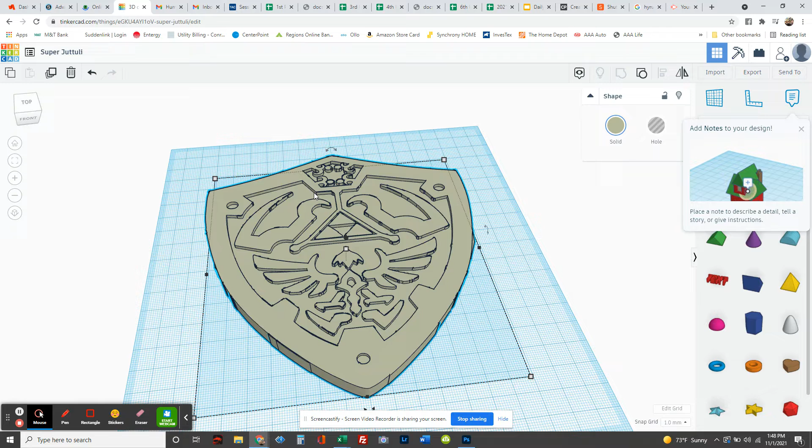Since my last video didn't record properly, I'm going to do it all over again. So, technical difficulties all day today. But anyway, we figure them out.

We make them happen. So the first thing you're going to want to do is find an image. I found this Hyrule shield. I've used this before, I've made the Hyrule shield before. I'm really just duplicating something I've done in the past, but that's okay.

You can pick anything you want as long as it's school appropriate. Nike symbol, logos, maybe your favorite rapper. I've had every kid doing something different.

But it has to be black and white. Okay, that is the trick. It cannot be like this Hyrule shield, any of these colors. That's not going to work out. Okay, it needs the contrast between black and white to work.

So I use this black and white image, and you're making shapes. You're making more robust shapes, so you can combine different shapes to create the thing that you're trying to make.

I have a lot of kids sometimes who want to do Dragon Ball Z. You would find black and white of Goku or Vegeta's hair. That'll work, and then you can import that in. But like I said, it depends on what you want to do.

So save your image. Okay, so you're going to save it as, there it is. I already saved it previously, but you save it. Then you go to the image converter. You choose the file. There it is. Open it. You're going to click Start Conversion. It will convert.

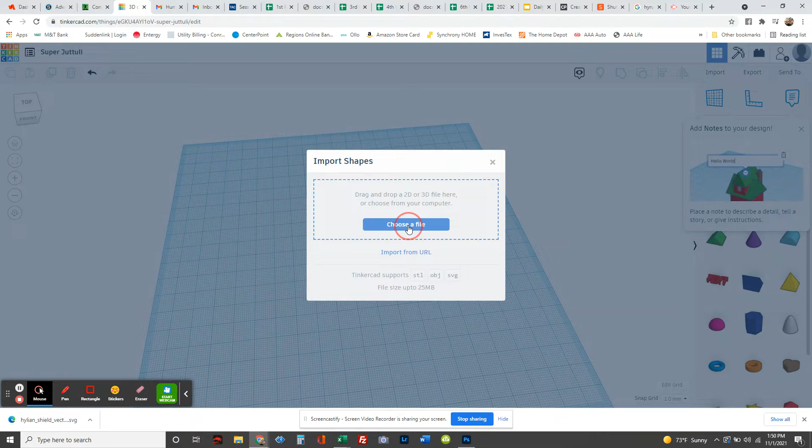Now I'll go back to Tinkercad. I will hit import, choose my file. There's my Hyrule shield. Hit open, import that.

And this might take a minute because it is big. As you can see, it's very big. Okay, huge. It will always be big. So this was 935 by 778.

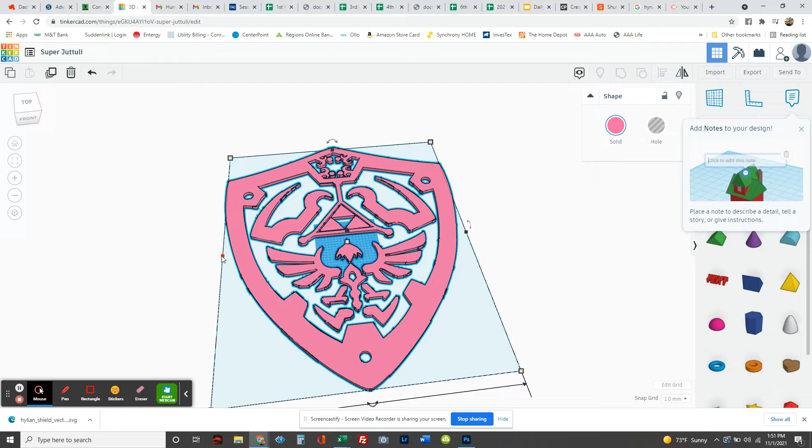That's a good question. Let's find out right now what the... Now it's not showing me the numbers. It was showing me the numbers. Anyway, there it is. I'm going to try and grab those numbers. I guess I can't. Anyway, if those numbers, you need to bring it down.

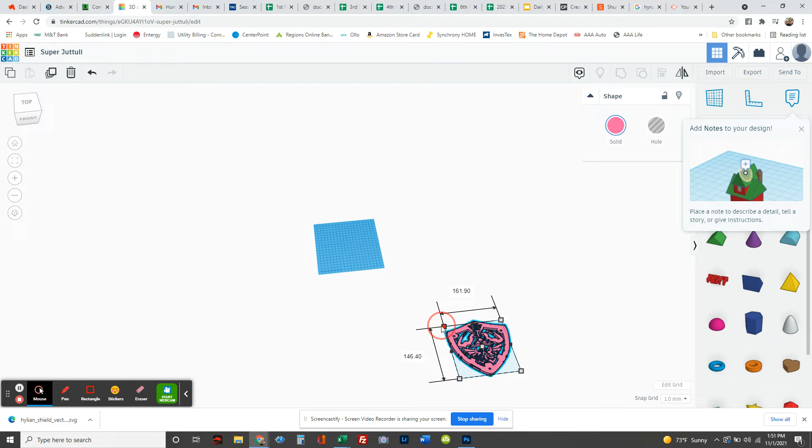So when you're importing your thing, you might get a message that says it's too big. It's got to be under 1,000 or something like that. Just make the lowest number 900. Okay, so there's my shield.

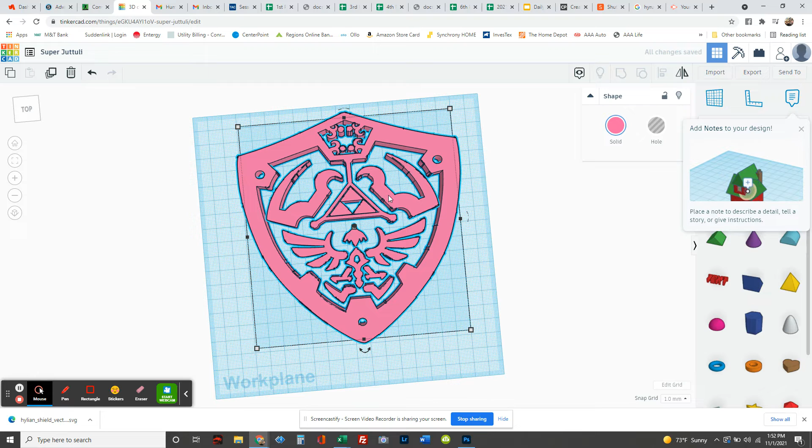Now it's fitting in the work plane. Here's the trick. I want my shield to be filled in, right? Because if you look at the way it is now, this part here and then these parts that print, they'll just be separate and it'll come apart on the build plate. So I don't really want that. I want it to be one big thing.

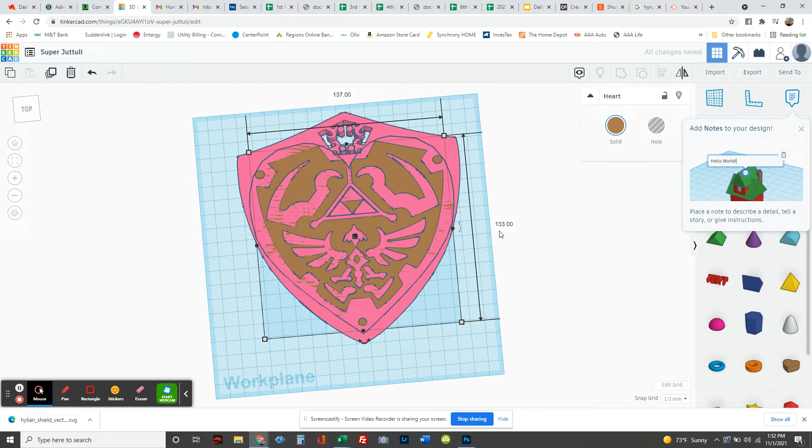So I'm going to fill it in, and I'm going to use a heart because the heart's kind of the shape of a shield. So we center the heart, move the heart over to all the corners of the shield, and make sure that it's not going through my corners here, but still filling everything in. That looks good.

And then you want to turn it this way so you can bring it down just a little bit. So you see the inside is still showing the design, but it is flat on the back and it's all filled in. It's going to be a solid thing.

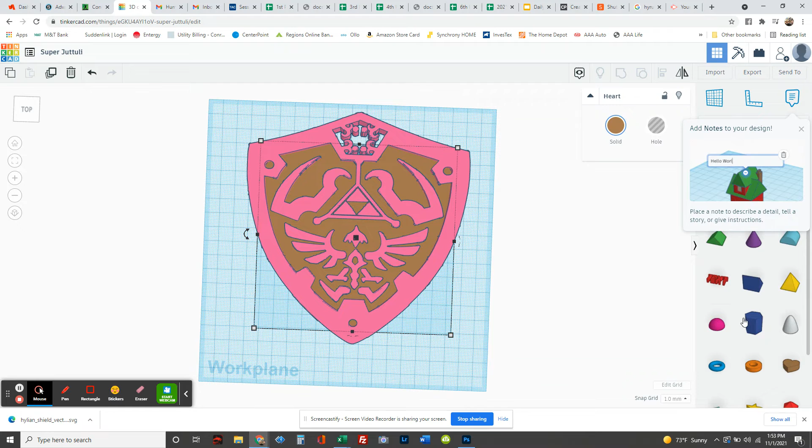So then last, I got to do the top part. So just use this hexagon. Same thing, fill it out. So that way it's filled in. Rotate it.

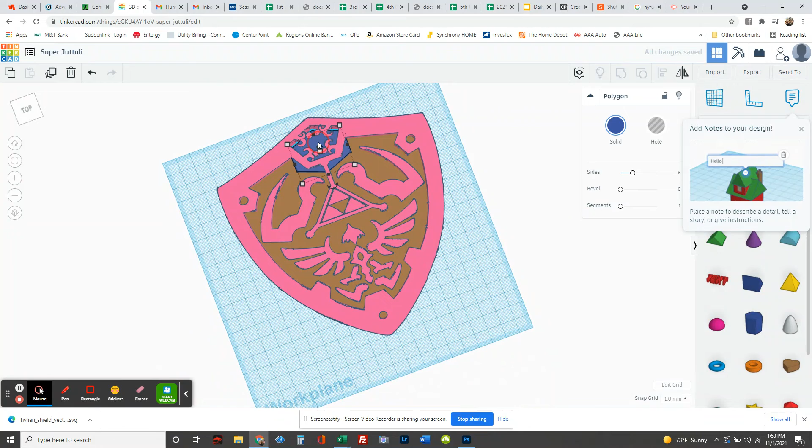Bring it down so it's showing. And then you look at it and make sure that it is filled in the way you want. It looks pretty good there. Getting what I want, very good.

I select it, I hit group, and now it will make it one piece. There it is, and it's ready for print.

My shield is done. So I've now made a more robust shape, a little bit cooler of a thing. This is how you create the things that you want to create beyond your basic shapes of a cone or a pyramid or a cube.